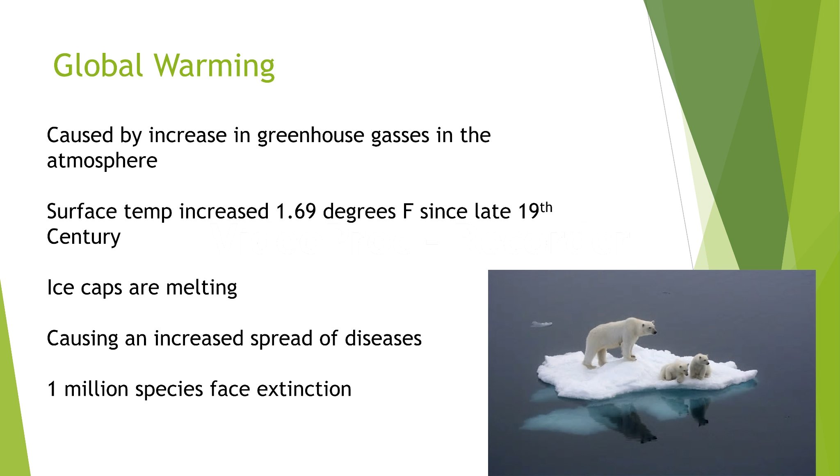The need for alternative energy comes from the issue of global warming. Global warming is one of the biggest threats facing the Earth today, caused by the release of greenhouse gases into the atmosphere. Some effects we are already seeing are an increase in surface temperature of almost 2 degrees Fahrenheit since the late 19th century. The ice caps are melting, causing sea levels to rise, which has led to a decrease in natural habitat for many species and is leading to extreme natural weather events. It is also leading to the increased spread of diseases in animals and humans, like the Zika virus. All of this has led to 1 million species facing extinction, and we could be next if we don't fix the problem.

Even with all of this, some politicians are still trying to say global warming is not a serious problem, claiming it is being caused naturally and humans aren't the real cause. Although there is no denying that humans are releasing greenhouse gases into the atmosphere at an alarming rate. 37.1 gigatons of CO2 were released into the atmosphere in 2018, a record amount.

The majority of these gases are being released by the burning of fossil fuels, mainly for the use of energy in the form of electricity, heat, and transportation. This amount of CO2 is not going to decrease either. With the continued increase in population and less industrialized countries becoming more energy dependent, everybody is using more energy every day. We need to change our habits and get emissions to zero if we want to end global warming. The only way to do this is to find an alternative for energy creation other than fossil fuels. This has been very difficult because fossil fuels are so plentiful and very cheap around the world today.

Solar power. The sun is the greatest source of energy known to man. If we can harness it correctly, it can be used as an unlimited source of pollution-free energy on Earth. The Earth receives more sunlight in one day than what is required to meet the energy demands of the world for 1 year. However, the technology is not yet ready to be commercialized and to power the world.

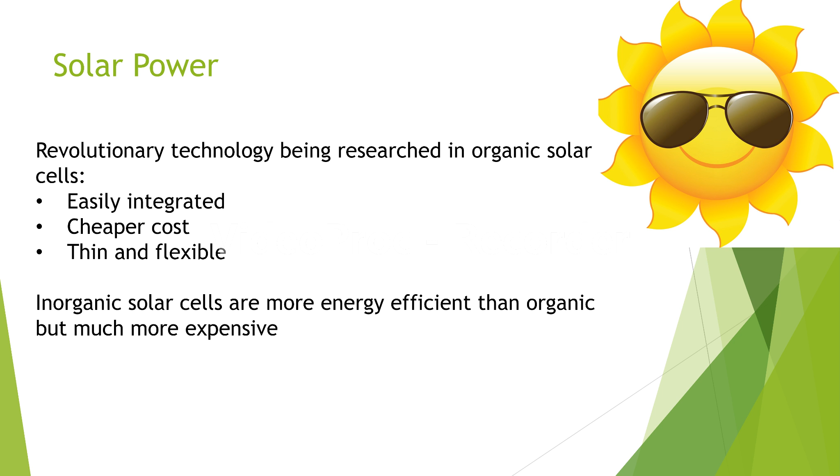At 15% energy efficiency, organic solar cells could reduce electricity costs to less than 7 cents per kilowatt hour, while the current average cost in the US is 10 to 12 cents. This is huge because if solar cells are implemented on a large scale, it would be a cheaper option than fossil fuels.

Wind power. Wind power is another promising natural resource that can provide unlimited pollution-free energy. Turbines restricted to just the non-forested, ice-free, and non-urban areas have the potential to supply over 40 times the current worldwide consumption of electricity.

Wind power has been rapidly increasing in the United States in recent years. The amount of energy produced from wind went from 1% in 2007 to 6% in 2016. Though with increased population and more urban areas being created, there's not an unlimited supply of area to build these turbine farms.

There's also an issue with creating more energy efficient wind turbines. The best way to increase energy output is increasing the diameter of the blade. There are, however, a lot of challenges that go along with this. The materials required in transporting these structures is very difficult, as well as it being more costly to produce and to maintain.

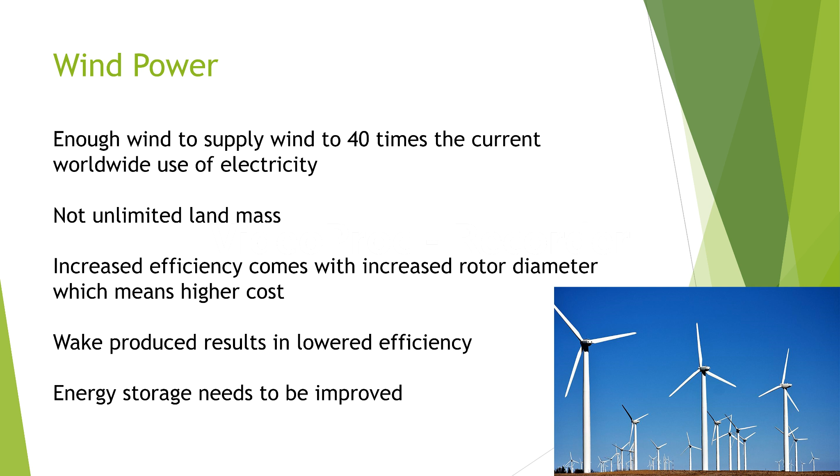Turbines also create a wake, which can extend over 50 kilometers downwind, resulting in losses of several millions of dollars over multiple years. And similar to solar cells, it is not windy everywhere all the time, and energy storage will need to improve to supply energy full time to everybody.

One way to counteract the space issue is that we can build offshore wind turbines to supply energy, but for large turbines, it's even harder to transport them for offshore turbines.

A new style of turbine they are designing to counteract the increased costs and material transportation issues are multi-rotor turbines. Turbines with 4 rotors can cost about 15% less to build, even though the blades cover the same area. And if one rotor goes down, the turbines still produce energy.

Studies show that multi-rotor wake intensity is smaller than classic turbines also. This is an exciting innovation that could be implemented wide-scale, improving wind turbines and making them a more large-scale energy source.

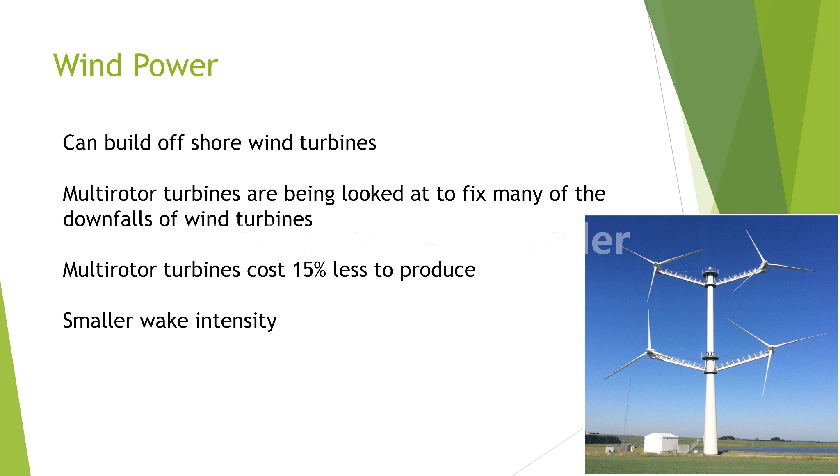Nuclear power is a very controversial energy source that has unlimited potential. Currently, about 11% of the world's energy is produced from nuclear power plants, with some countries getting a high percentage of their electricity from nuclear power. In Ontario, Canada, 60% of electricity is generated from nuclear power, and in France, 72% is from nuclear.

The downfalls of nuclear technology include the high costs from developing the technology and setting up the power plants, especially in highly regulated countries. The current plants also produce a lot of nuclear waste, which cannot be used and just stored somewhere carefully.

Also with safety, people have a hard time trusting anything nuclear. And the tech used in some of the new power plants is the same technology that can be used to create nuclear weapons, which is obviously an issue that needs to be considered.

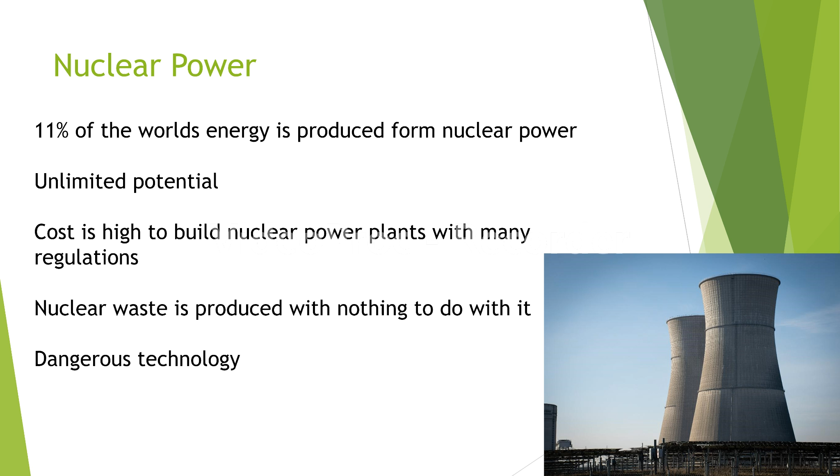If this technology was used on a large scale globally, then every militant country and most likely terrorist organizations would be able to figure out how to create nuclear weapons. This technology would have to be highly regulated by the rest of the world when it comes to dangerous rogue nations.

Research in nuclear technology have led to the idea of breed and burn reactors. These reactors work like a candle burning down and run on nuclear waste. These reactors eliminate waste completely as well as lower costs of fuel.

A company called TerraPower has been working on and designing a power plant with this tech since 2007 and plans to place the first one in operation in 2026. The idea for TerraPower came from the thought of instead of burning just the 1% of uranium, burning the other 99% as well, which was originally thought of as waste.

This was never considered possible before, but now with the power of supercomputers being able to simulate these reactors, it shows that it is possible.

There is currently enough leftover uranium in Kentucky to power the U.S. for hundreds of years. This means if the United States implemented these types of nuclear plants around the country, we would have a free energy fuel source that would last for hundreds of years and would be pollution free.

Also, by filtering uranium from seawater, there is potential to have enough energy to supply the entire planet for the rest of its lifetime. This makes nuclear power the most viable source of sustainable energy. Even with the dangers nuclear energy has, it has too much potential, and to shy away from it would be stupid.

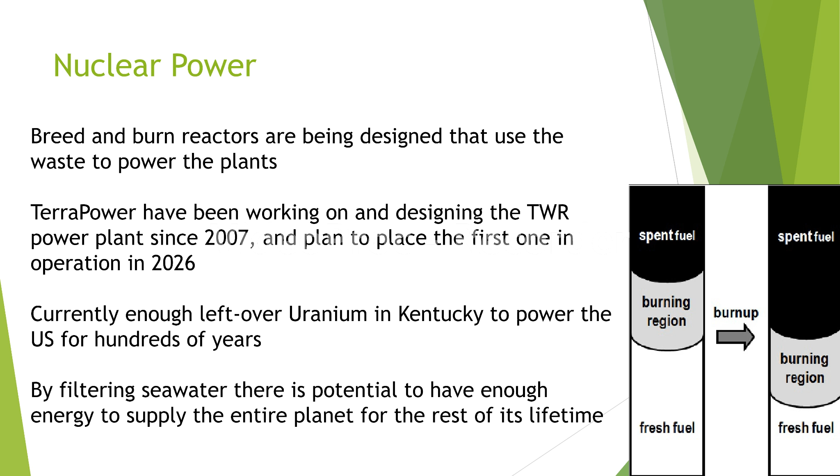Biofuels are made by converting created plants or microorganisms into fuels, commonly biodiesel. The first types of biofuels were created from food crops like corn, wheat, and maize. However, this takes a lot of area to grow the crops, which takes away from the food supply.

The most promising are algae biofuels, because they can grow rapidly and produce large amounts of fuel. Biofuels are being looked at so heavily because they are currently the only alternative to liquid transportation fuel and can be used in vehicles without a lot of engine modifications.

But there are a lot of issues with the biofuel industry. Several companies like Shell and ExxonMobil are abandoning their investments in environmentally friendly fuels. These companies making algal biofuels have struggled to retain high productivity at a large scale and have predators contaminate their farms. Building and maintaining these farms is very expensive, and the economics just don't make sense with oil prices dropping.

There also need to be a lot of consideration when choosing where to put the farms, due to potential impacts on water stress in high water stress areas.

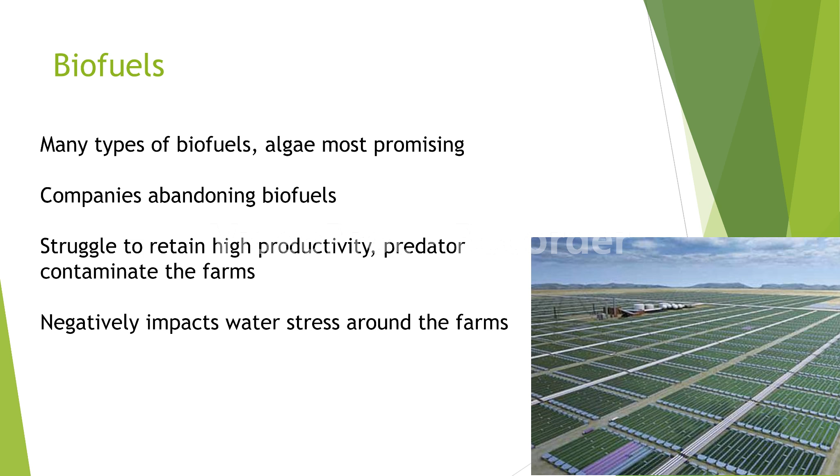Though there are a lot of issues, the biofuel industry is working on ways to help get the industry back on track and have success. People have found that algae can be made into other useful products like bioplastics and dietary supplements. Since these products can be sold for higher prices than biofuels...

...selling these products as well as biodiesel can help offset the high price of algae cultivation. Another way to save money is by placing these algae cultivation ponds near municipal water waste facilities. These facilities provide nutrients for the algae and can help save $1 million a year if within a mile of the algae ponds. These ideas could do a lot to help make algae cultivation cheaper, but...

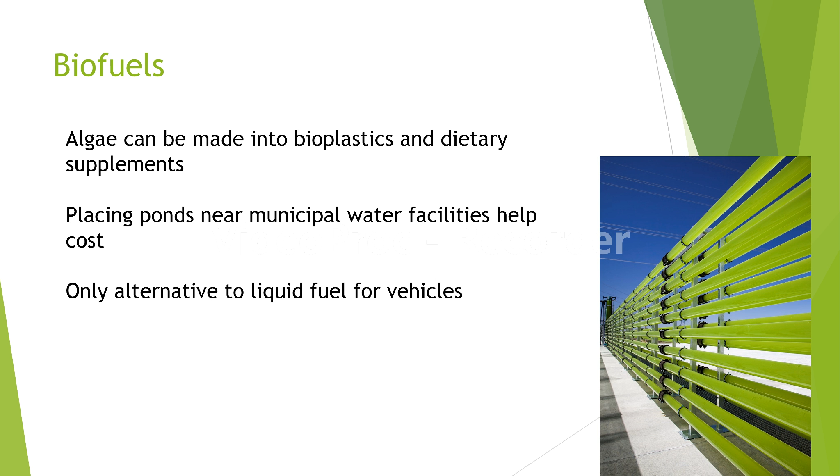...until they find out how to make these ponds sustainable on a large scale over time, the industry is going to struggle. Looking into improving these, though, is probably a good idea since biofuel is the only alternative liquid fuel source, unless we convert to completely electric cars and electric planes. This is going to be an issue.

The last alternative energy technology I decided to study is hydrogen power. Hydrogen power is a promising source of renewable energy that emits zero emissions into the environment. Hydrogen is the most commonly occurring element on Earth and is found in water, which covers over 70% of the planet. The United States produces 100 billion cubic feet of hydrogen each year, and NASA has been using hydrogen technology for years on their rockets.

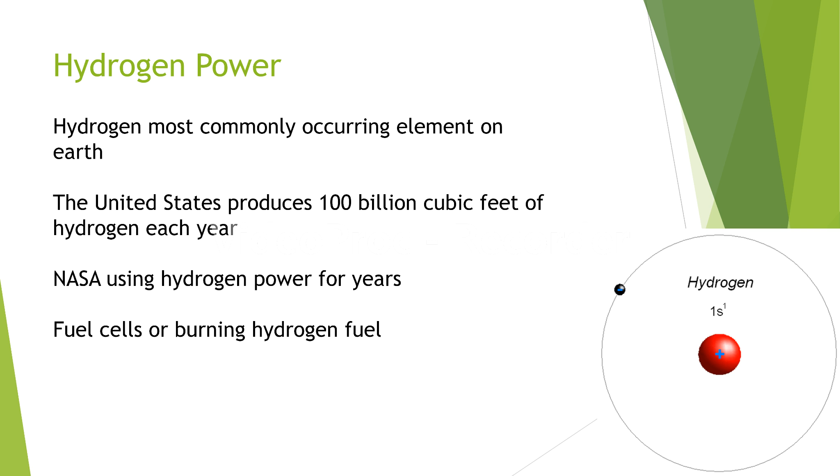Hydrogen as a fuel source can be used to produce energy through fuel cells as well as burning hydrogen fuel. Fuel cells are the most common source of hydrogen power. They have a high conversion efficiency of 60% compared to fossil fuels, which are 34% efficient. They're also grid independent, making them very attractive for applications in places like hospitals and data centers.

As you can see in the picture, they work by taking in hydrogen fuel, and the only byproducts are heat and water.

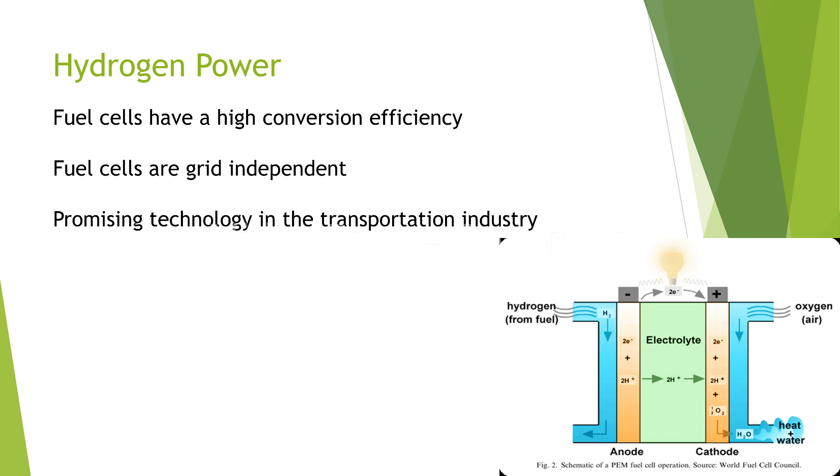Fuel cells are also being used for transportation in hydrogen-powered cars and buses. This is exciting since the only emission produced from these cars is water vapor. Honda, Hyundai, and Toyota have leased and sold more than 6,500 fuel cell vehicles in California, and many more companies plan to produce their own vehicles in the next couple of years.

The issue with hydrogen power is the technology is not yet developed enough to make it cost effective on a large scale. The cost of fuel cell generation is 100 times that of a gasoline engine. There are a lot of requirements for the design membrane in a fuel cell, like excellent proton conductivity, chemical thermal stability, good mechanical strength, and low cost, to name a few. None of the available membranes meet all of these requirements.

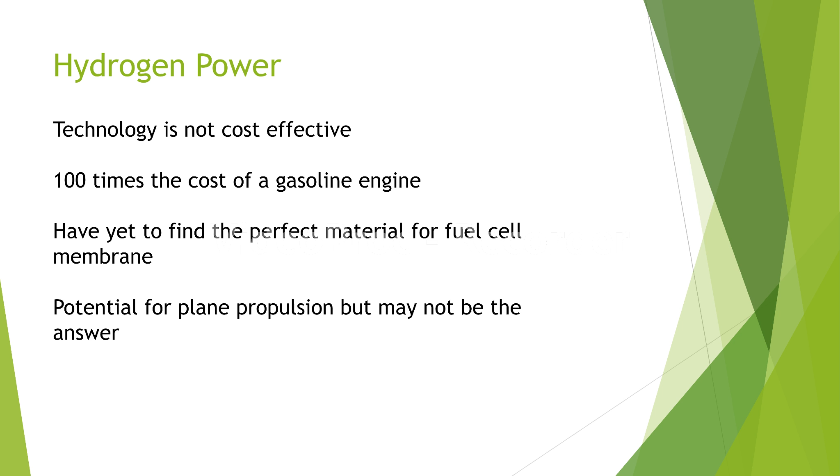Hydrogen could also be used as propulsion fuel for planes, but it produces large amounts of water vapor in the atmosphere, which contributes to net warming, adding to global warming just as much as current fuels do.

If some of these challenges can be overcome, hydrogen power can be an efficient energy source for electricity. Hydrogen vehicles and fuel cell home heating systems have already been sold in many countries. Hydrogen-powered cars are the most similar alternative to gasoline-powered vehicles. They have a driving range of 300 miles and are more fuel efficient than regular cars, and they can refuel in minutes. This makes them very promising for public transportation.

Hydrogen power has a lot of advantages, but like many other alternative energy sources, a lot more technology needs to be developed in order to make it a more realistic energy source that eliminates the use of fossil fuels.

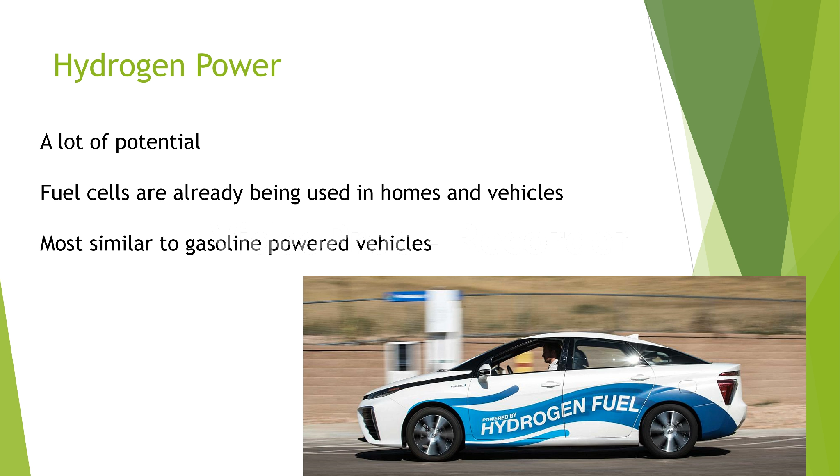So that is my summary on many of the promising alternative energy technologies today. All of them are still in the process of being developed to the point that we can completely eliminate fossil fuels, but we are close. I don't think there's a single solution to this in our future, and many of these technologies will have to be used together to power the world and get the energy industry to the point where we exert zero carbon emissions into the atmosphere. Thank you.